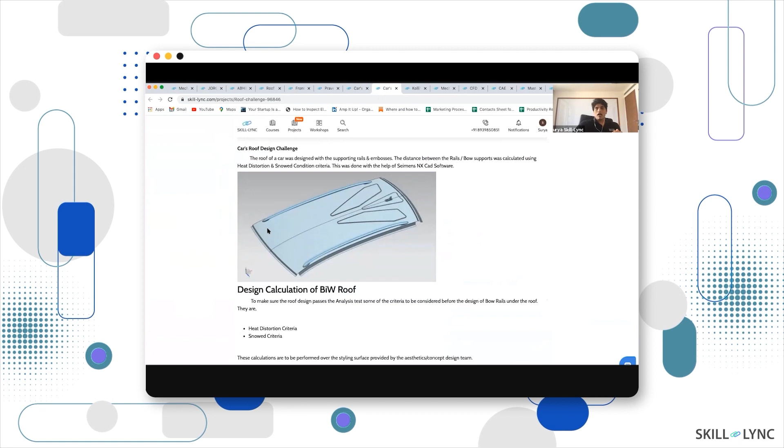Say you're designing the roof of a car—how do you design that? What are the criteria? You need to understand heat distortion, snow load criteria, and how to calculate that. Pen and paper calculations become very important, and applying those calculations into your design and building it becomes very important.

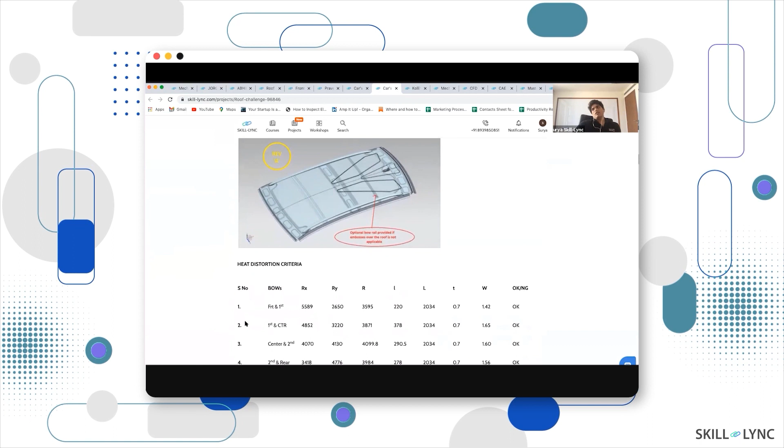So if you're in quality or production, what you need to do is figure out which segment of design and development you want to pursue. If you're inclined toward a design career, you need to look into the skill sets required as a design engineer—it could be sheet metal, plastic modeling, automotive body-in-white, lights, surface design, or seating design. There can be a multitude of options. Once you decide, building a portfolio really helps.

I spoke about design. One of the other things people want to do is get into CAE, computer-aided engineering, which might be in the computational fluid dynamics domain or in the finite element analysis domain.

The fundamental principle is, irrespective of whether you are a fresher or have 0 to 2 years of experience, what the industry looks for right now is whether you've had exposure to the right engineering principles. How do you get that exposure? Usually people say, only if I get a job will I get that exposure. That is not true nowadays. With platforms like Skill-Lync, you can essentially get this exposure.

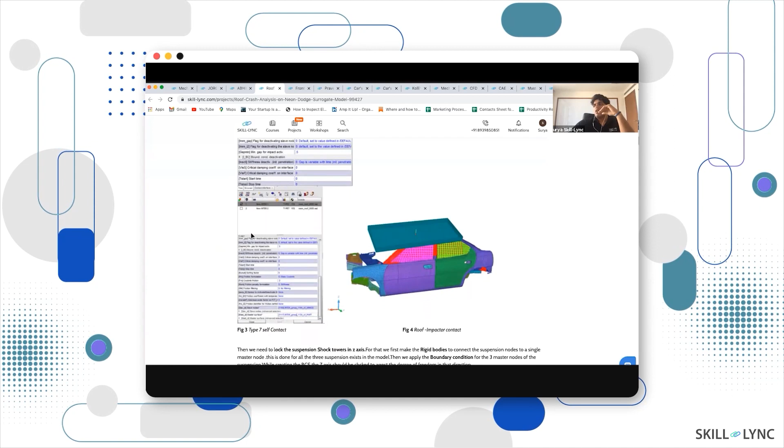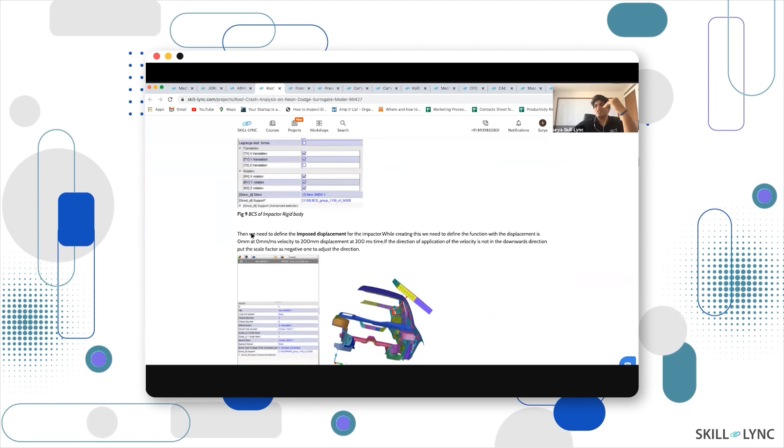For example, this is Abhiram's profile, and these are the projects he has worked on. When you have a portfolio like this, it becomes your essential online resume. Here Abhiram is showcasing how he performed a roof crash analysis on a neon Dodge surrogate model. This is essentially how industry also thinks about engineering. When an engineering manager is hiring for a crash analyst or structural analysis engineer, understanding that Abhiram knows the tool and also the fundamental principles behind it becomes very important when applying for a job.

When you are looking to set up a career in design or development, think about what area you want to get into. Here's a roof frontal crash analysis that Abhiram has worked upon. See the amount of data and the report that he has taken a look at. And how did he do that? He did not do it alone. This is where platforms like Skill-Lync help students, where they can work on industry-oriented problems by learning those problems as part of the coursework itself.

That was just one example. If you want to look into computational fluid dynamics, again, this is Orge Lozano. Not only students across India but across the world have understood that building profiles and working on industry-oriented projects becomes very important, and that allows you to succeed whenever you apply for jobs.

So now, I'll stop my screen. One of the things I wanted to speak about was, if you are focusing on a particular domain, your goal needs to be figuring out how to gain that experience in that domain. If you're working on production or quality or a non-core job, you can still get that experience. You just need to figure out how to get it.

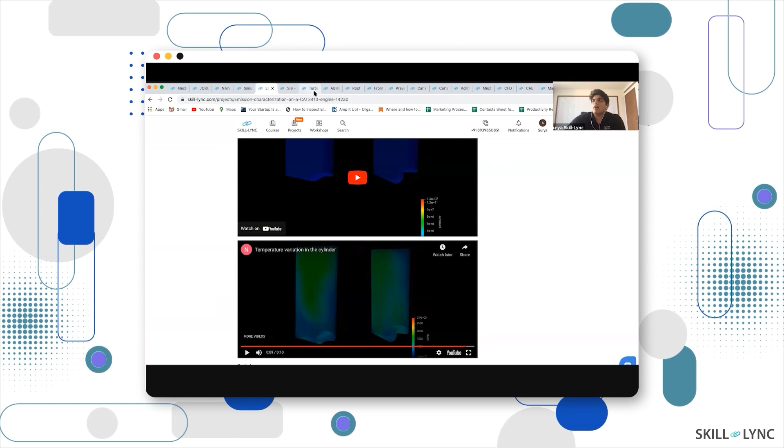This is another student, Tilak. Sarang was speaking about the 1D tool. Here he performs a turbocharger analysis, and you can see how he has set up the whole 1D simulation, system level modeling as they call it, with GT Power.

So that's something that I wanted to speak about. Let me see if there are any other questions.

Ranjita Sudha Gowda asks: I'm a final year mechanical student, and I want to do design. What are the best softwares I have to learn to get the job? What are the areas in the industries which is best for girls? What are the job opportunities for girls in design? Irrespective of girls or boys, the opportunities in design are a lot.

So let me try to dive a little deeper. If you take a look at design, there are a few aspects of it. Sarang, can you see my screen? We're seeing a Word document. Yeah, yeah, great.

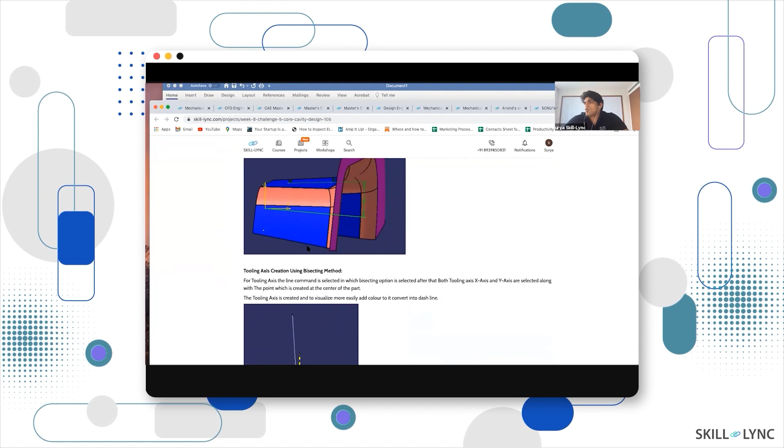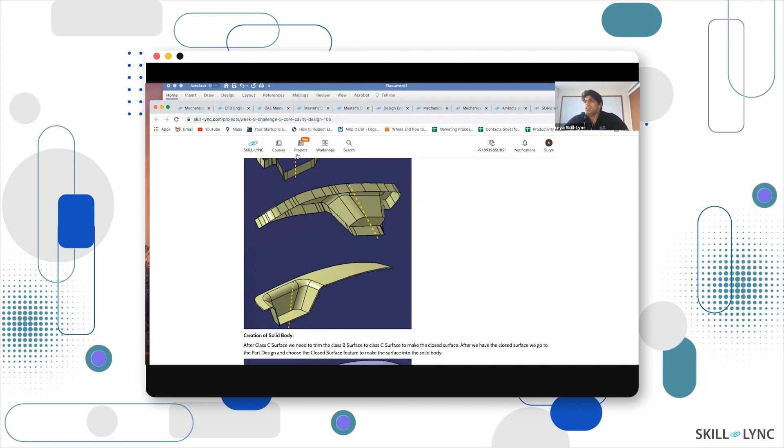What is draft analysis? Has he done a draft analysis? As a production manager, these are the questions I'm going to ask in an interview. And if Sonu Raj answers these questions, based on this project, I will call him for an interview. Then he needs a fundamental understanding of what he's worked on in the projects, and he needs to explain his project in a very solid way.

And that's the same with Arvind Ashwin - he has worked on multiple projects. Say, for example, if I want to pick a particular project and take a look - centrifugal pump design analysis. So I'm looking for a CFD role. And if I'm able to understand what kind of analysis that student has worked on, this allows me to see that the student understands the fundamentals of computational fluid dynamics and has set up a simulation as well.

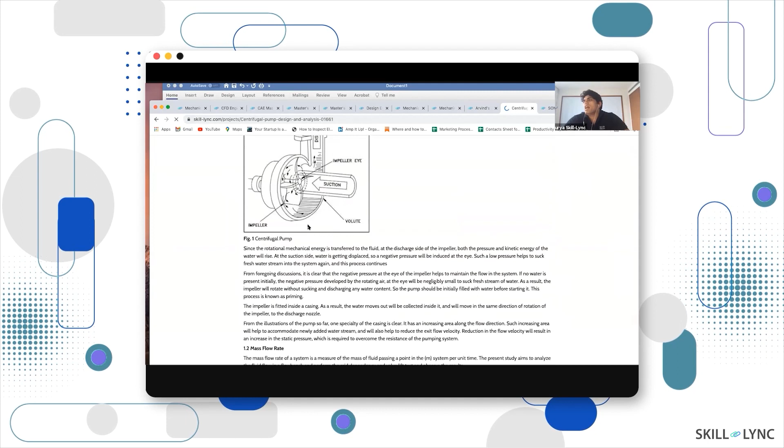Now this allows me to call him for an interview and ask fundamental theoretical questions, and then if he clears that, go for a tool test. So when I speak about having engineering experience, I mean having work experience from working on engineering projects. And that's essentially what all these students have worked on.

You can go to skill-lync.com/placements and take a look at all the students - these are students who did not have experience in the domain of their interest, and these are people who got recruited based on the projects they worked upon. You can just click on it and take a look. I'll paste this in the chat box so you can take a look at these placements as well. So yeah, just wanted to speak about that.

Raghav, yes, students who enroll in Skill-Lync coursework can essentially work on those projects. Great, okay, I see a lot of questions, but since we're short on time, I'm going to move on.